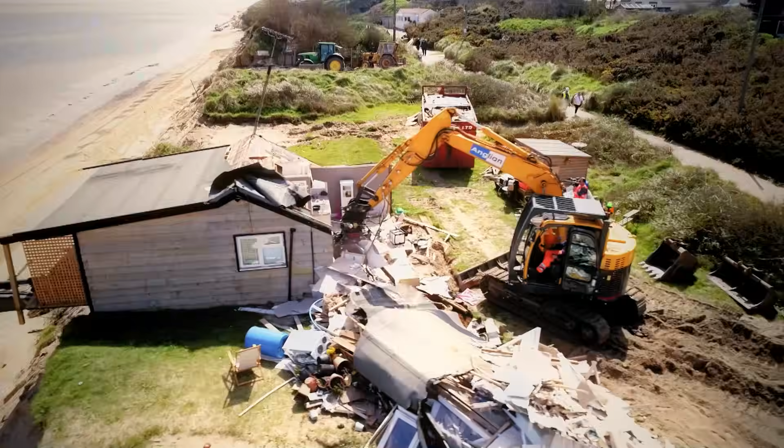With big builds, even the smallest mistake can be a huge disaster. From miscalculations to misunderstandings, these are the massive engineering mistakes that only an expert can hope to fix.

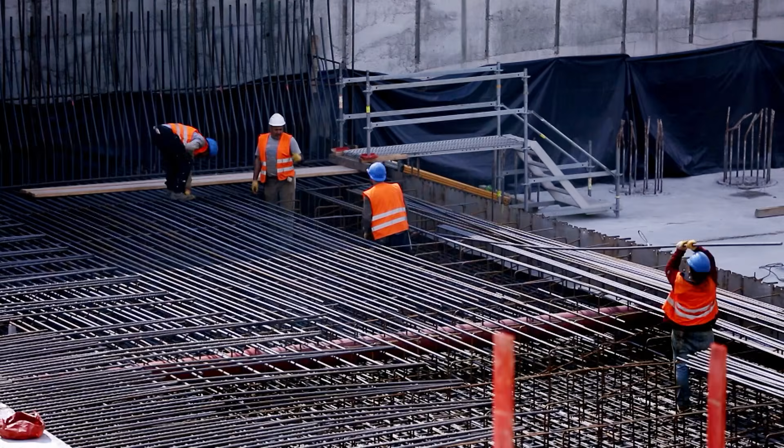When it comes to revolutionary design, sometimes we can learn from the past, other times we can improve on it. But rebuilding on an old foundation can be a huge mistake.

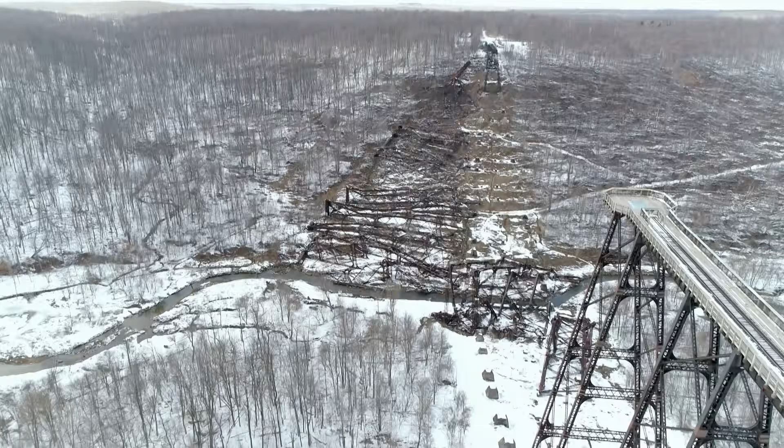For this construction calamity, we head to Pennsylvania, USA, and a famous bridge that fell from grace. This is a massive fail. It's utterly incredible that no one got hurt. If a train was going over it, it doesn't bear thinking about. What was once considered the eighth wonder of the world is now a relic of engineering oversight.

The small town of Kinzua, like many other places in Pennsylvania, was central to America's steel production. In the 1880s, demand spiked and trainloads of coal were needed to feed the factories. Railroad engineers faced a giant obstacle, the steep, deep Kinzua Gorge off the foothills of the Appalachian Mountains. The trains had to get through, so they set to work on one of the most ambitious construction projects of the day, the Kinzua Bridge.

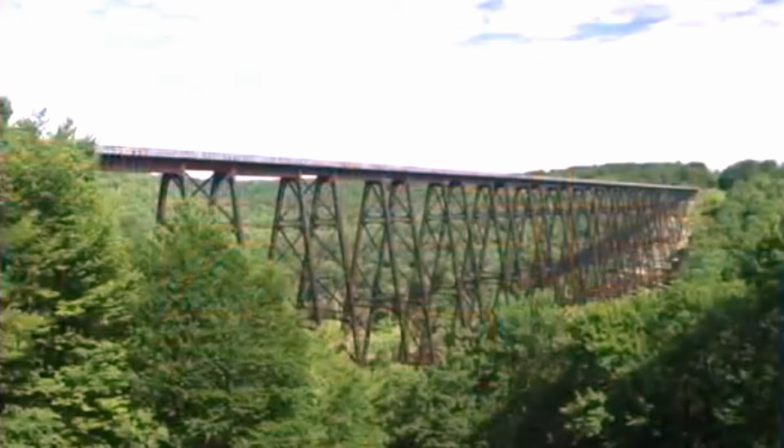Completed in 1882, at over 300 feet tall and 2,000 feet long, Kinzua Bridge was the tallest railroad bridge in the world. At the time, this was pretty much the eighth wonder of the world. It was such an unbelievable achievement. Even with today's technology, this would be a challenge, let alone back in the 1800s. So to actually achieve a viaduct over that size gap was incredible.

Jerry Clark from the Bridge Foundation knows what made this build so epic. Other railroads went around the Kinzua Valley. The bridge went across it and used every bit of the engineering technology available during that time. To achieve this shorter direct route, the bridge had to be high, long, and capable of supporting heavy coal trains. Engineers ruled out the conventional bridge-making materials, stone and cast iron, instead choosing wrought iron.

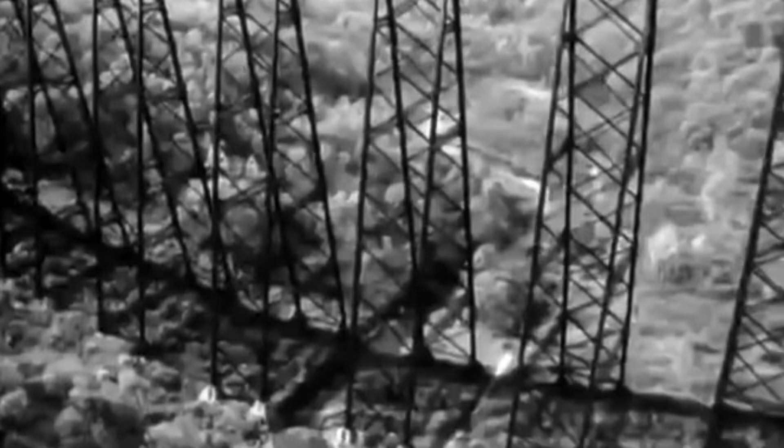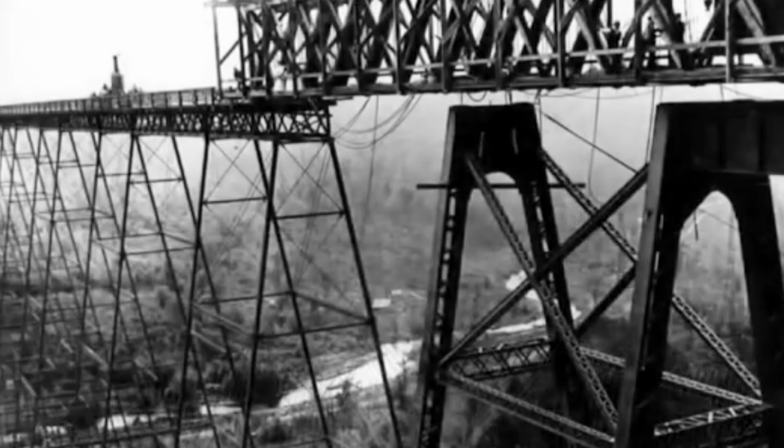Building a bridge of this size out of stone or brick would have taken forever, and using cast iron would have been too brittle, so they looked to wrought iron as a suitable material. Wrought iron had another advantage too: it's malleable. So they used sheets of iron to create an innovative support structure known as phoenix columns. These phoenix columns were made out of wrought iron that was folded around and held together with rivets, and this made them stronger and lighter. The revolutionary design was also quicker and cheaper to build.

However, within a decade, locomotives doubled in weight. This meant more strain on the bridge and more vibrations. Vibrations are not a bridge's friend. You expect them up to a point, but here we had a tall, long bridge with trains going over. The trains were getting heavier and heavier. They had to be careful not to push it too far. The material could withstand it to a point, but whatever they did, they did not want that material to crack.

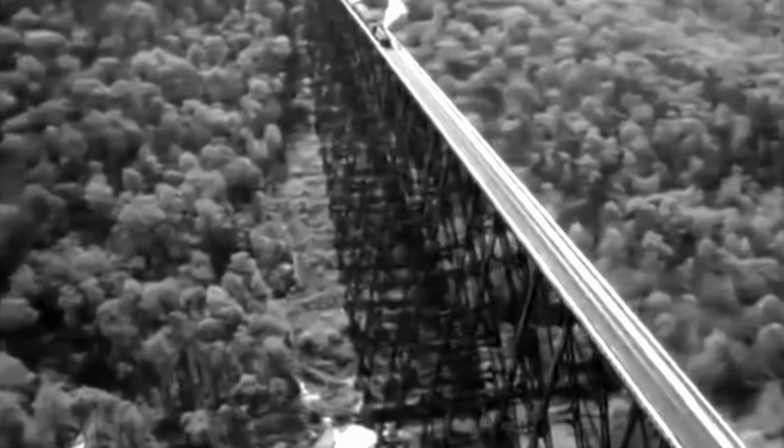To minimize vibrations, trains were forced to cross at just 8 kilometers an hour, not the most practical solution in a fast-moving world. Fortunately, an alternative was now readily available: steel. At the time, steel was the strongest, lightest and most flexible bridge-making material around.

So it sounds crazy, but they actually ripped the old Kinzua Bridge down and rebuilt it in steel. No bridge meant no coal, so a quick construction was essential. In just a matter of months, 120 men erected the new bridge. 90 days is all it took to completely rebuild the tallest railroad bridge in existence.

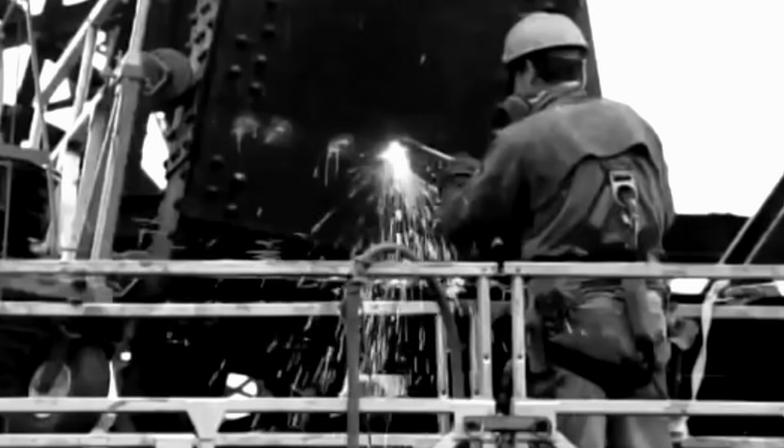The new steel bridge used the original trestle design, with large A-frames supporting the pier on top. It could now carry as much coal as the steel mills needed. But in an effort to save time, a decision was made that would turn out to be disastrous.

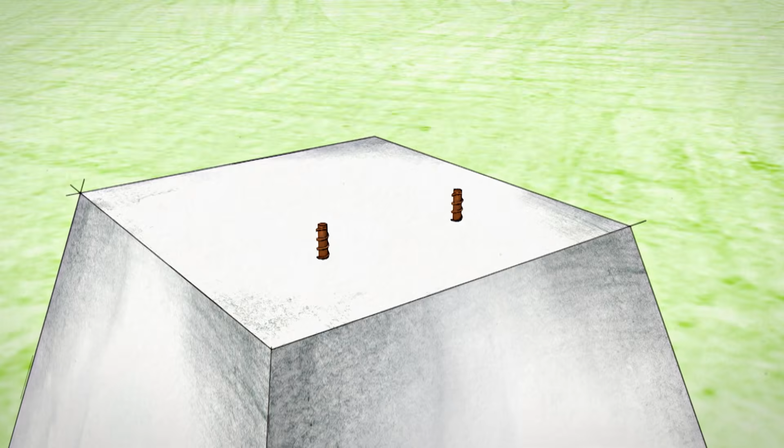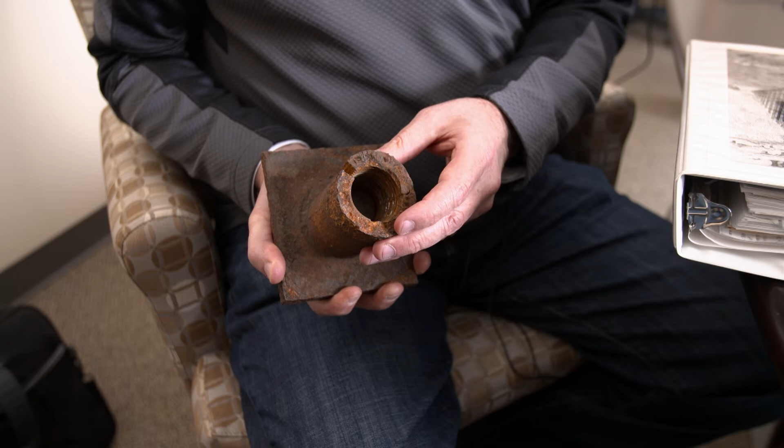Rather than installing new steel anchor bolts to hold the bridge in place, the legs were secured to existing bolts. They were too short, so engineers used extending nuts called collars to bridge the gap. Replacing these anchor bolts would have taken forever — you would have needed to dig out and blast away. It would have been a real hassle, so instead they just put these collars over the top. At the time, the collars seemed a reasonable solution, but they hadn't completely factored in Mother Nature.

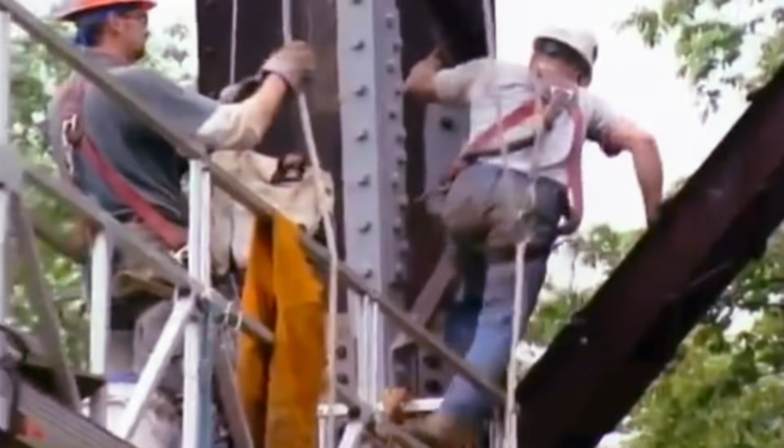This quick fix did the trick, and the bridge carried freight and passenger trains for over a century without incident. In 2002, a maintenance team discovered corrosion on the bridge's legs. They closed the bridge to trains and pedestrians and began repair works.

But in the summer of 2003, disaster loomed. An epic tornado spiraled towards the Kinzua Gorge. Structural engineer Brian Emberg was on the restoration team.

In July of 2003, I got a phone call in the middle of the afternoon that a tornado had hit the bridge. I jumped in my vehicle right away, made the trip, and got here right about dusk. It was clearly a tornado scene — trees everywhere, clouds and mist. I met with the crew and made my way down to the edge of the ravine, turned the corner, and the valley just looked filled with smoke, like you would expect after a battle.

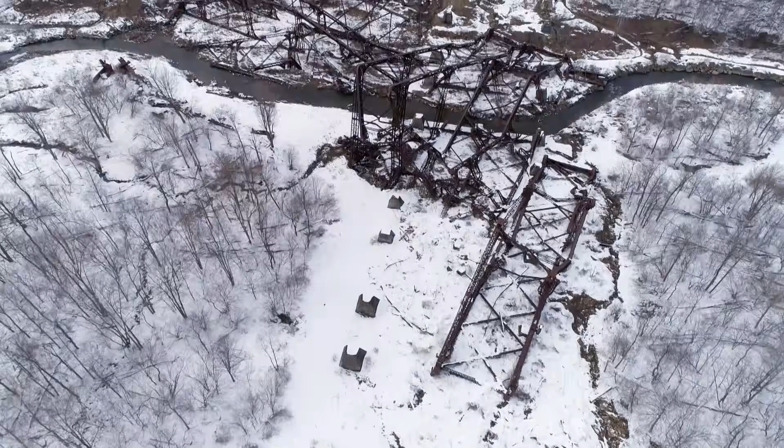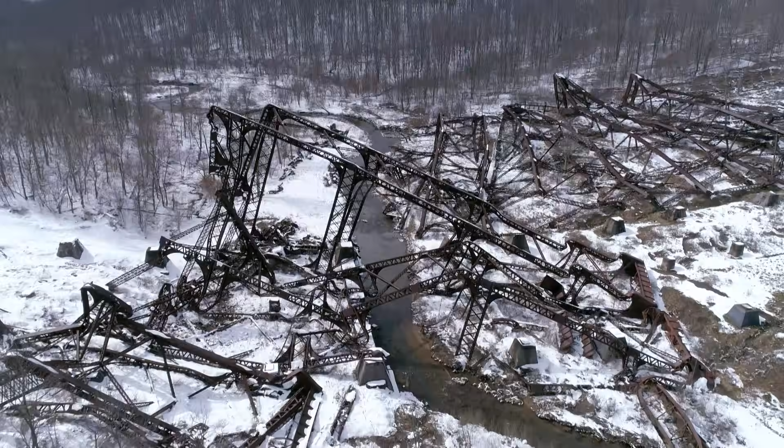You could barely make out the structure in the fading light, and you could see pieces of steel emerging from the fog, and what remains of the structure still standing. It was clear it was a catastrophic failure. The 160-kilometer-an-hour tornado had sent a huge section of the bridge crashing to the valley floor.

This must have been so frustrating — they were onto this problem, they saw it, they were acting on it. If it struck a few months later, they would have been fine. This is such bad luck.

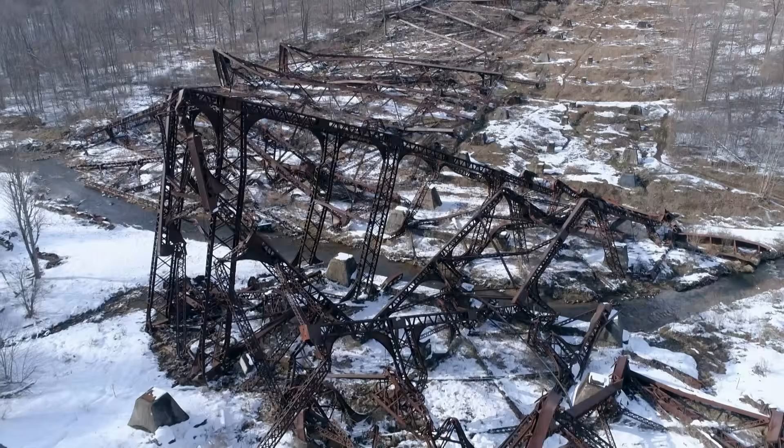Although devastating to the repair team that spotted the corrosion, closing the bridge had potentially saved hundreds of lives. To have such a freak storm of nature come in and take it down was really devastating to my crew, my team, and me personally, that we weren't able to get to it and save it in time.

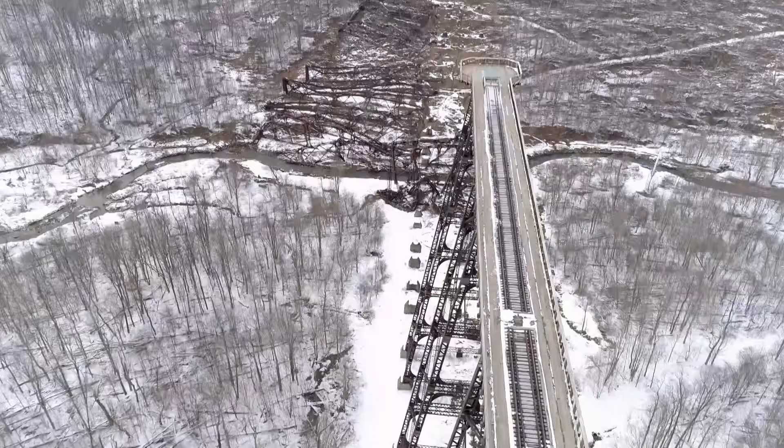Had the tornado arrived a year later, we'd have finished with the repairs and hopefully sustained the structure so it would have survived the storm. The day that it fell down in there, you kind of felt like you lost a family member.

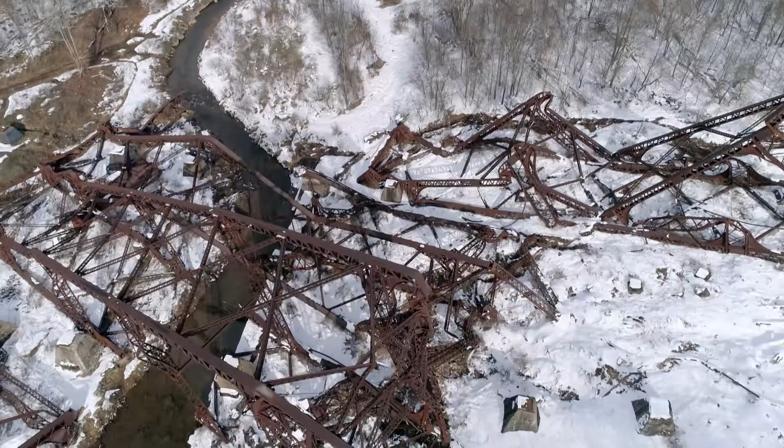Brian and his engineering team suspected the original iron anchor bolts and new steel collars were to blame, and their suspicions were confirmed in the wreckage. The next morning, I went down to the valley and found these anchor bolts and couplings littering the floor everywhere, where they had ruptured and failed at almost every single pier. The choice not to replace the iron anchor bolts with steel was catastrophic.

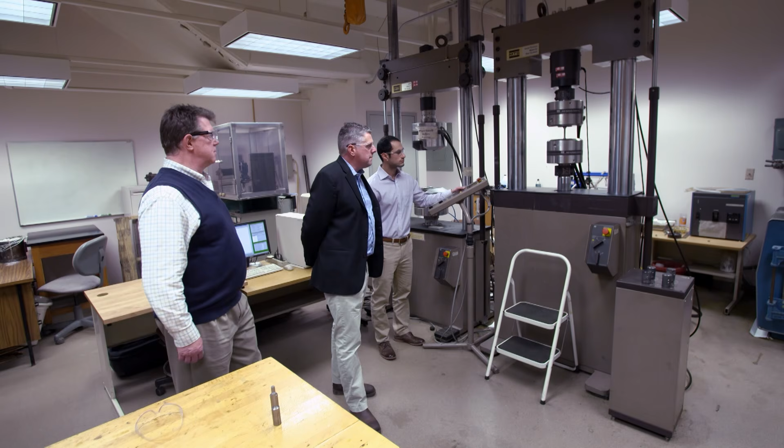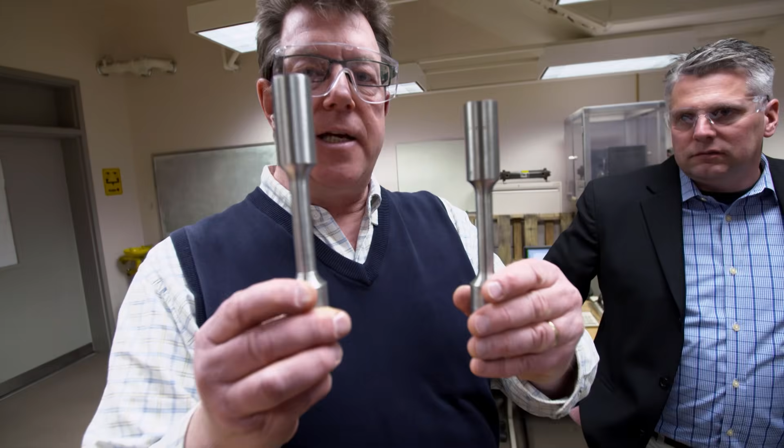To demonstrate steel's strength and flexibility, mechanical engineers Dr. Mark Zupan and Dr. Tim Topoleski are using a load frame. The one on the right is 1018 steel, and the one on the left is cast iron. You can kind of see that they look similar, so looks can be deceiving. We're going to test the two of them and see what happens. The load frame measures the amount of force required to fracture the metal by pulling it from each end.

First up, the iron. In tension, cast iron expresses a brittle behavior — a behavior in which it fails without warning. Now the steel. There it goes — the steel exhibits what we call ductile behavior. You'll see the specimen narrow in the middle, and that's what we call yield behavior. Essentially, the specimen is absorbing energy to allow it to handle more load, and therefore, in contrast to the cast iron, you get a warning before it fails.

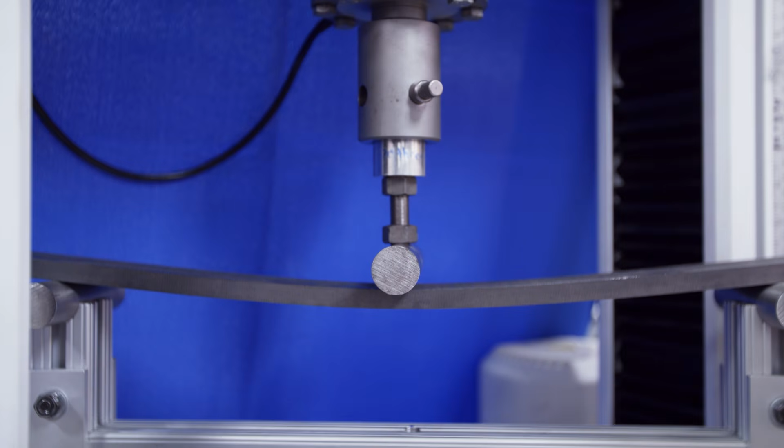So although similar, steel's structure gives it increased flexibility, whereas iron can crack without warning. Metals can either be brittle or ductile. A brittle material like cast iron shatters when it breaks, much like glass. A ductile material like steel, though, deforms before it breaks, giving you a visible warning sign that failure is about to occur. So when you use steel in a bridge, you get a warning that it's about to break before it does.

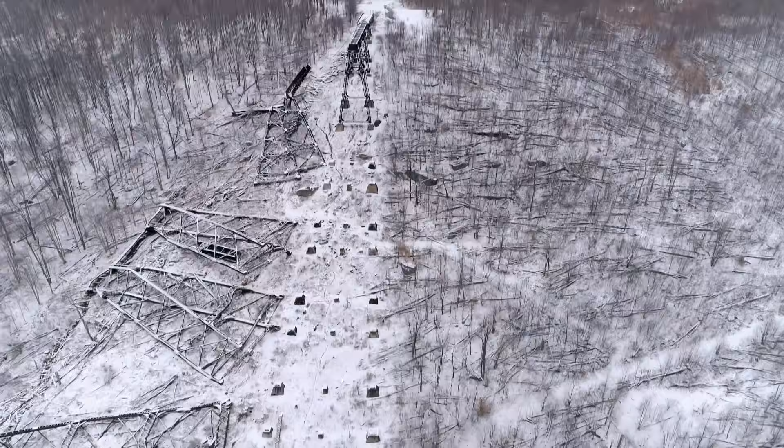Although steel was clearly the stronger and more flexible material, the bridge's iron anchor bolts didn't fail until the tornado of 2003. The problem was that the original designer didn't think there was going to be uplift. Uplift comes from wind blowing on the towers. When wind blows on the tower, it wants to try and overturn it, and so on this leg there would be uplift. The original designer used these because he didn't think there would be uplift, when in fact there would be with a 100-mile-an-hour wind. And it turned out to be inferior, especially after years of wear and tear, and it cracked.

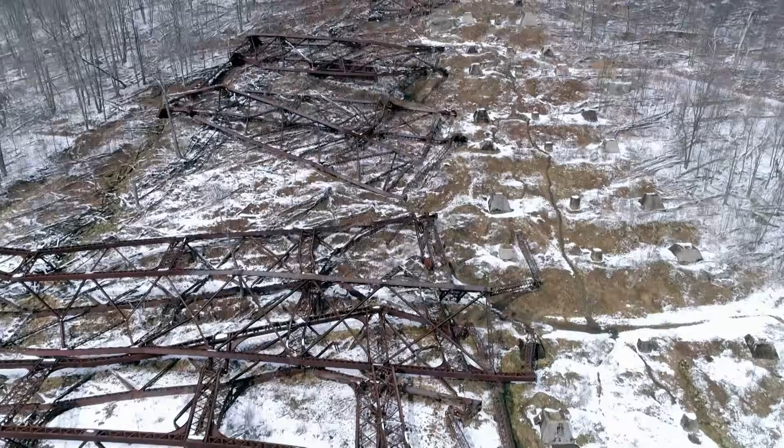A combination of extreme weather and the decision not to replace the anchor bolts over a century ago was the undoing of this epic piece of engineering. This was a hugely ambitious project, and at the time it really pushed the boundaries of engineering knowledge, and it looks like a tiny miscalculation and the use of these collars unfortunately led to the demise of this bridge.

Today, around 180 meters of the structure still stands. Rather than tear it down, it was kept as a monument to mankind's ingenuity in engineering. Everything here could have been scrap metal, but there were people that had the foresight to say, this is worth saving. Actually, there are more people that come to the bridge after it was down than when it was up.

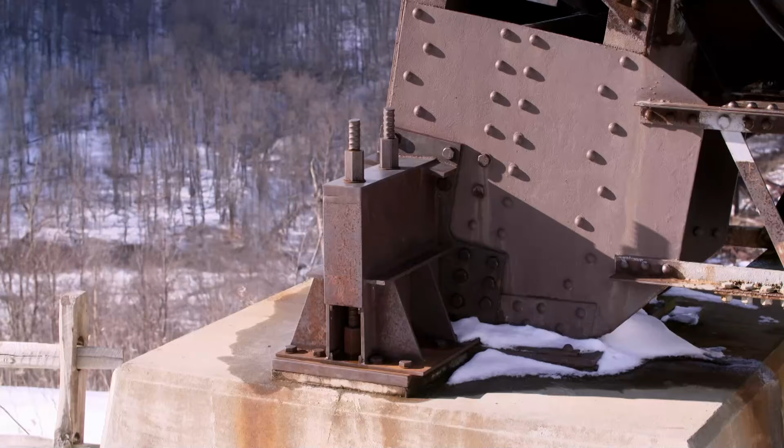To prevent any further collapse, Brian and his team have devised a solution. It's no surprise that it includes steel anchor bolts, an idea that the original engineers overlooked. When it comes to the foundations, you should never cut corners. It may have taken over 100 years, but that lesson was learned in spectacular style.

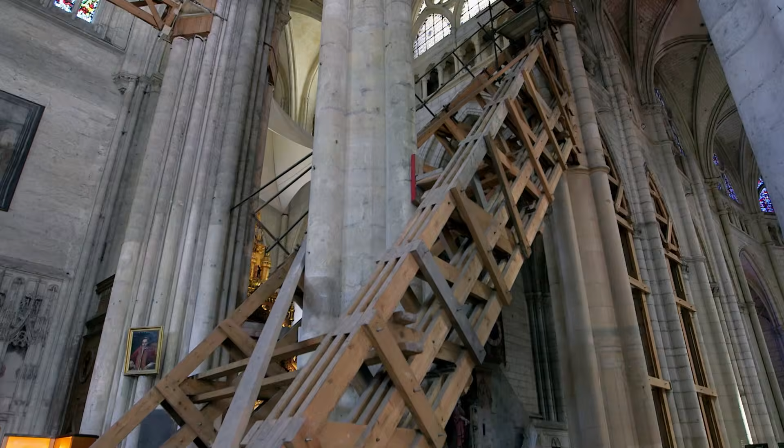Some construction calamities are unhappy accidents, but other times, engineers really should have known better. Like this story in northern France, and a cathedral that's experienced a catalog of catastrophes. This one is a blockbuster of a building blunder. It seems the engineers' zeal to reach the skies clouded their better judgment. This cathedral has been the victim of a combination of tragedy and folly. And when modern-day engineers tried to make a fix, it almost ended in disaster. It's a miracle it's still standing.

Beauvais, a small city in northern France. But there's nothing small about its 800-year-old centerpiece, the gravity-defying Cathedral of Saint-Pierre. So we've got Sagrada Familia, yep, Notre Dame, yep, St. Paul's, but St. Pierre's of Beauvais.

Although little known outside of France, the ambition of this cathedral once rivaled any other on Earth. Dr. Tom Nickson is an expert in religious architecture. Beauvais Cathedral was begun in the 1220s by an extremely ambitious Archbishop, Bishop Milo of Nanteuil, and his vision for this cathedral was really something that would trump all the other major churches in France and the region.

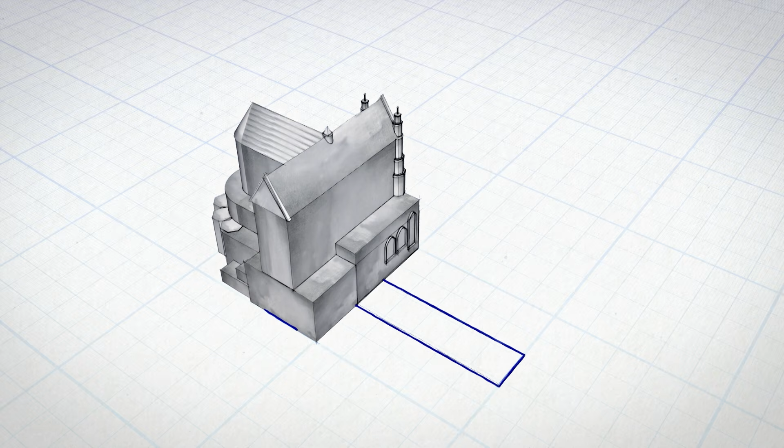Most cathedrals are designed in the shape of a cross, with three main sections: the choir for the clergy, the transept, which forms the arms, and the nave for the congregation. The nave is often long and grand, but here there was an obstacle. Beauvais could never be particularly long because the site was constricted by the presence of the Bishop's Palace at the West End. So it could respond to the ambitions of its patrons by being, first of all, very wide, but it could also be very, very tall. And this church, as built, was taller than any Gothic building ever built.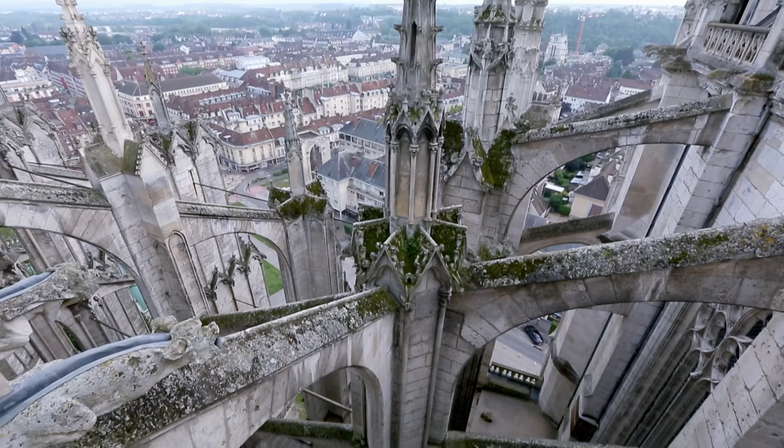And size was very important. With cathedrals, just like stadiums and concert halls, the aim is to have as much space as possible under one roof. But of course, the taller and wider you go, the bigger the engineering challenge. And the greater the chance of making catastrophic mistakes.

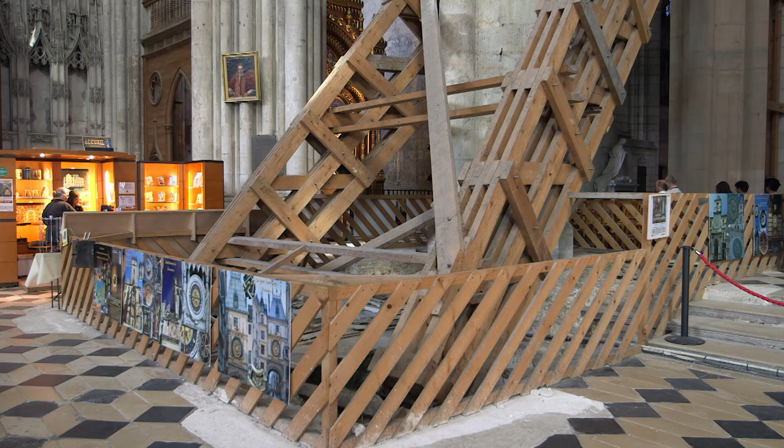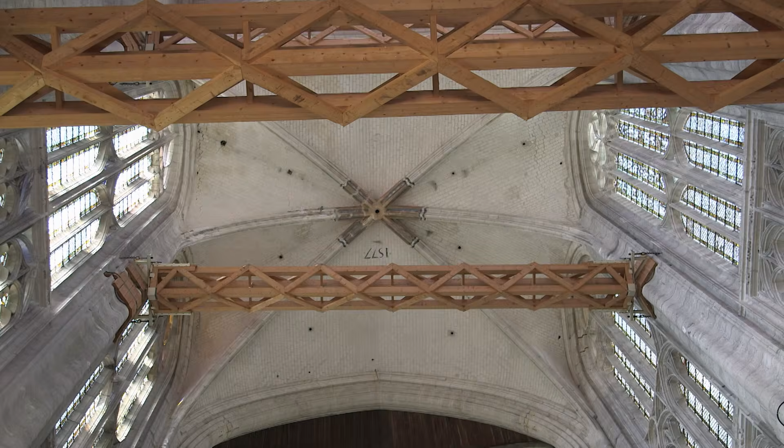On close inspection, the grandeur of Saint-Pierre is overshadowed by centuries of repairs that literally hold the building together. And it's all because the original engineers were more focused on height than stability. In fact, their drive for height was so relentless that they had to hold up the tall, unstable walls from the outside.

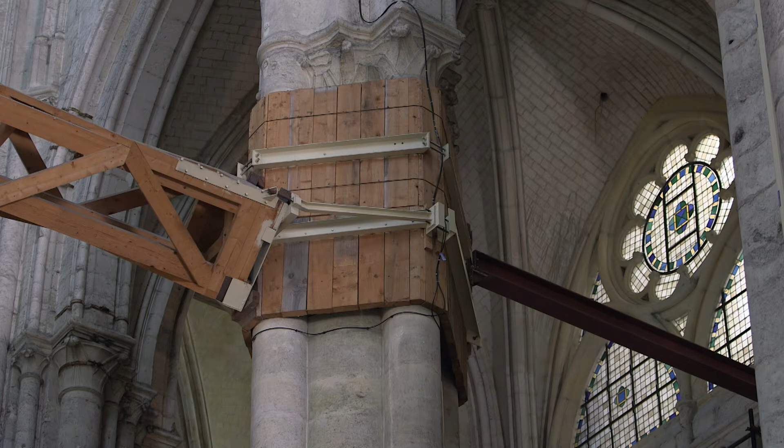So it's really remarkable to be able to come up here to the upper parts of the cathedral. Up here, we can really get a sense of the way that this forest of flying buttresses supports the upper levels of the choir. And what's really extraordinary, I think, is many of these flyers, these piers, are still super slender.

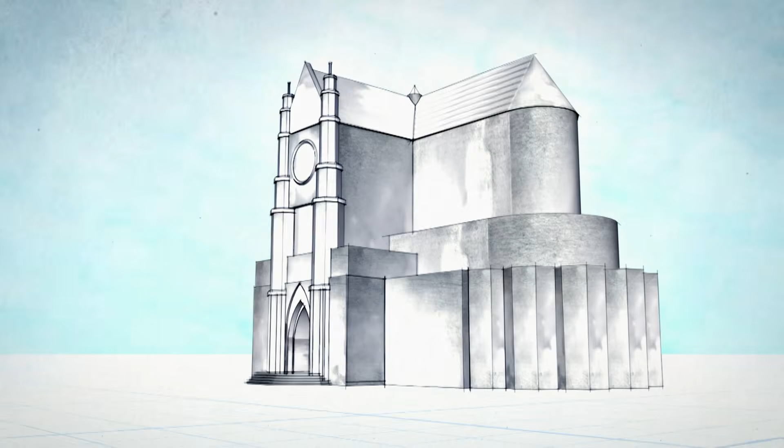Flying buttresses act as an exterior skeleton to support the cathedral, but are built to look ornate and elegant, not like mere scaffolding. Engineers hoped these buttresses would be strong enough to prevent collapse.

They're working very hard to ensure that the windows are not obstructed at all, so that we have this wonderful sense of vertical thrust from the cathedral, even though the reality is the very opposite. What we have is gravity trying to pull this building down.

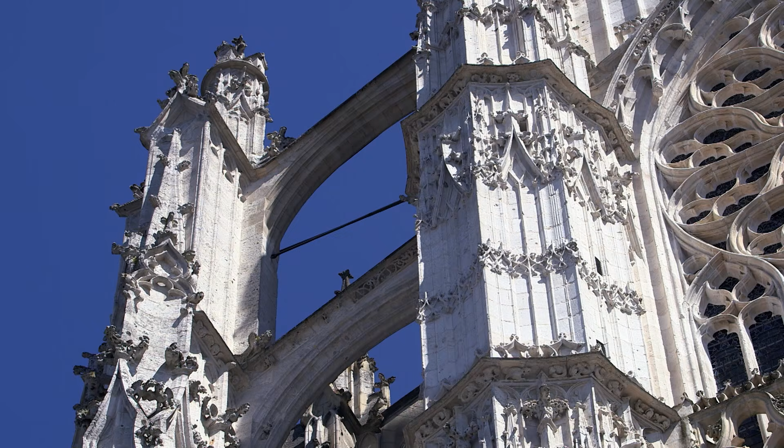Back in 1284, Saint-Pierre's ongoing battle with gravity came to a head when a fierce storm hit the town of Beauvais. The devastating winds twisted the flying buttresses, forcing them to breaking point. Suddenly, the high vaulted ceiling came crashing down.

The city didn't let that stop progress. The damage was repaired and construction continued. In the 1500s, the cathedral reached dizzying new heights, with the lantern tower soaring over the choir.

Jean-Lucien Guénon, one of France's chief architects, explains.

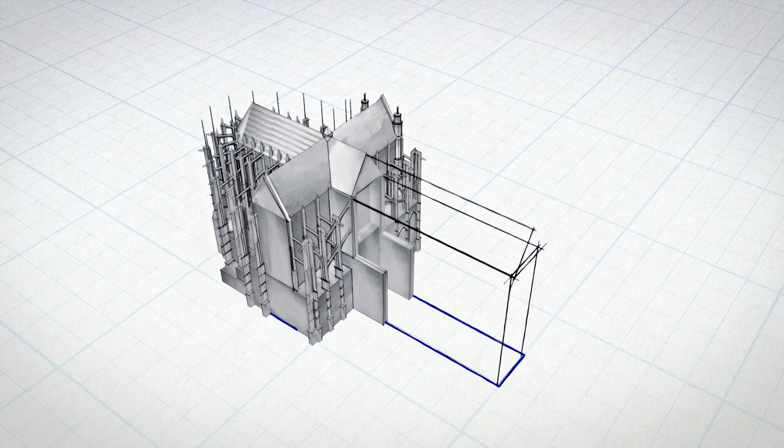Defying centuries of cathedral construction logic, Saint-Pierre's was built with only the start of a key structural element: a nave.

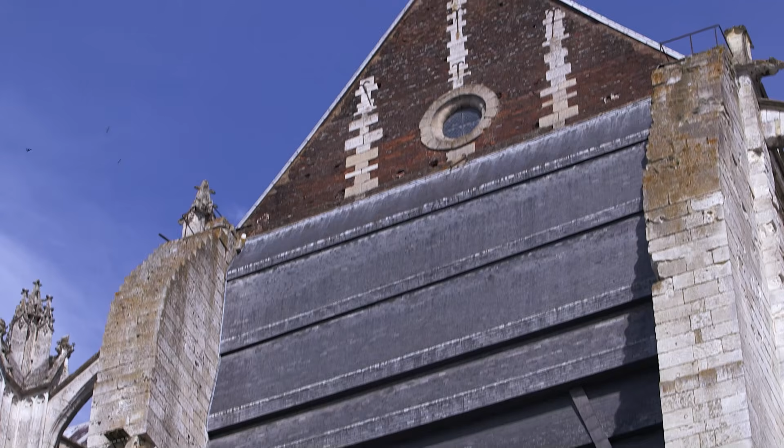So here we can see the junction of the 10th century cathedral, which originally extended much further to the east, and the new work, the new Gothic church begun in the 1220s, although what we're looking at here is really the transept in the very beginning of the nave, begun in the 16th century.

The ancient church didn't provide any support for the massive new cathedral. Leaving the nave unfinished was a fundamental error. The huge weight of the towering walls was pushing them outwards.

They went to all the trouble of digging 10-meter deep foundations, which would have been a huge undertaking, and yet they didn't finish off the nave, which is the essential part to keep the rest of the cathedral standing.

Fixing the damage caused by the collapses finally drained cathedral finances, and construction of the nave was put on hold for a few hundred years.

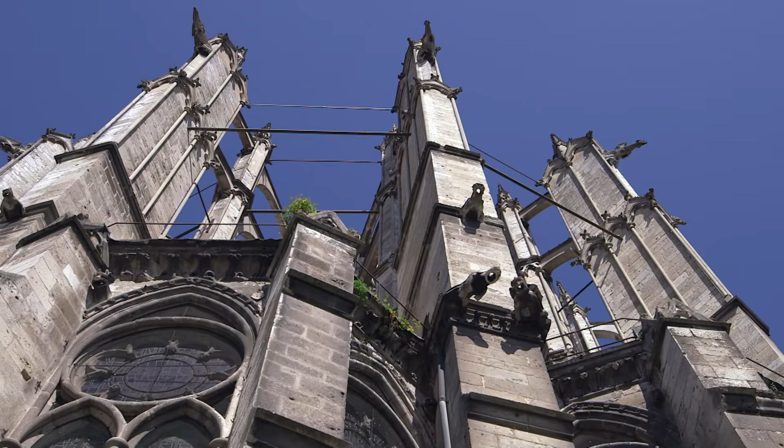Fast forward to the 1960s, and modern-day engineers thought they knew better, with almost catastrophic results. It was decided to replace them, but this time not with iron, but with steel tie bars that had less flexibility. Whereas the old structure had a certain amount of give and take, it could respond to the winds, the new structure was much more rigid.

By replacing the iron tie bars with steel, a more rigid alternative, the cathedral had lost its flexibility, which left it at the mercy of Mother Nature. So basically, by trying to modernize the fix, the engineers had actually made the cathedral more vulnerable than it had been for centuries.

With such a fragile piece of architecture, today, engineers keep a watchful eye on any change in the cathedral's stability. Saint-Pierre is closely monitored, using modern technology. Constant Chacoz and his team use highly sensitive sensors to detect the slightest movement.

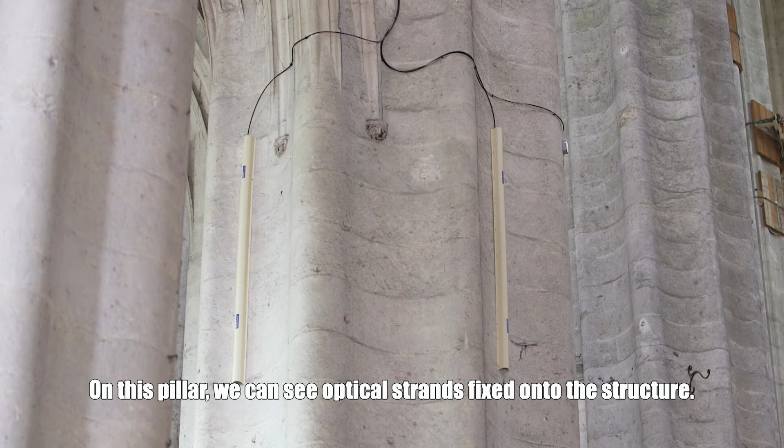On this pillar, we can see optical strands fixed onto the structure. Optical strands are very accurate sensors dedicated to the measurement of strain and displacement of the structures. The resolution of these sensors is about 1 micron, which is 100 times smaller than a hair.

1 micron might seem like a tiny amount, but when you've got thousands of tons of stone shifting around, I'd want to know exactly what was going on.

While monitoring for modern-day movement, Guillaume Caron is laser mapping the cathedral in 3D to check for hidden defects in the original construction.

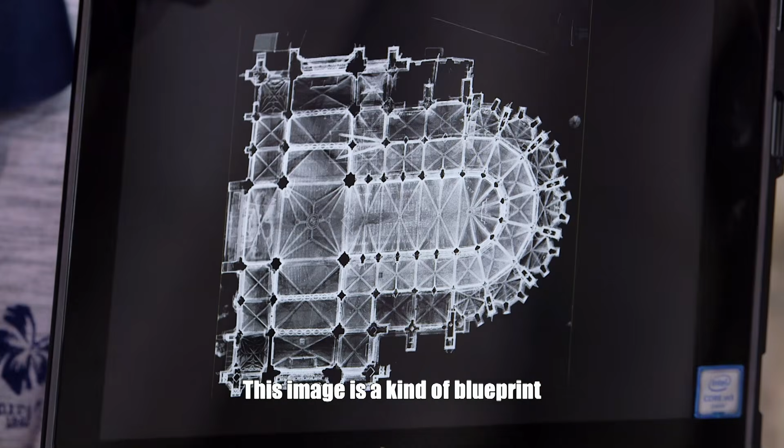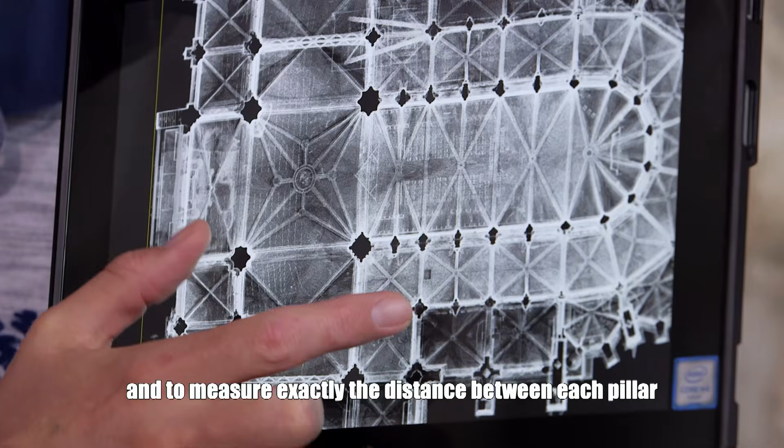This image is a kind of blueprint, but made from a 3D digital model of the Cathedral of Beauvais. And what is interesting from this information is it's not a manual drawing, it's got from measures. So from this digital blueprint, we can highlight some deformations and measure exactly, for instance, the distance between each pillar in the cathedral.

Laser scanners bounced high-energy light off every surface in the cathedral, creating a highly detailed picture of the building. It was so detailed, they could see things that weren't visible to the naked eye. What Guillaume's team has discovered is more than a little disturbing.

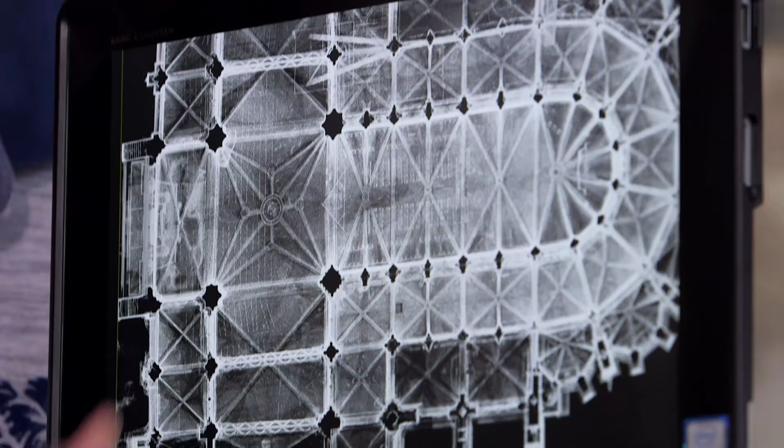So, using this image, for instance, we are able to highlight that the pillars that are on the southern part of the choir are very nicely aligned, but there are some misalignments between the ones in the northern part.

These misalignments have remained undetected throughout the ages, but reveal a whole new instability threat. We were surprised by these deformations and the fact that the building is still not collapsed.

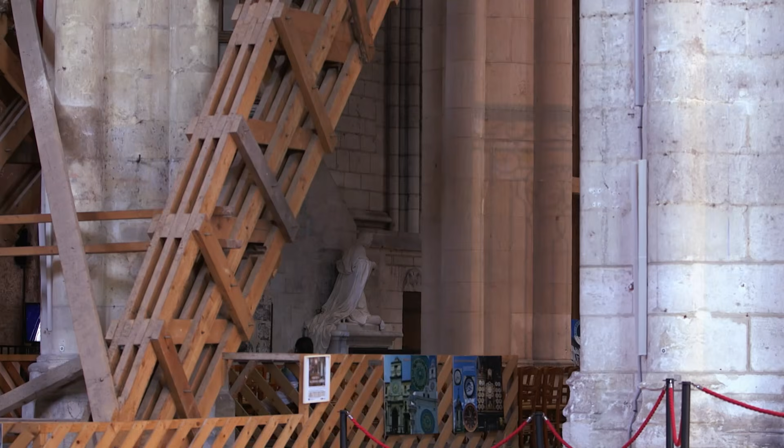To further stabilize the walls, engineers have taken the radical step of installing giant braces. The braces, they're not pretty, but at least the cathedral is still standing. This building is clearly a survivor.

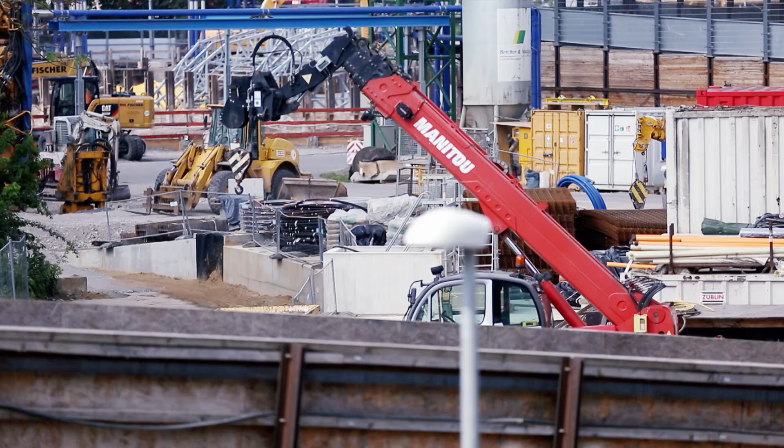Engineers building groundbreaking projects have to consider every worst-case scenario they can dream of. But sometimes, even the best-laid plans can turn dreams into unexpected nightmares.

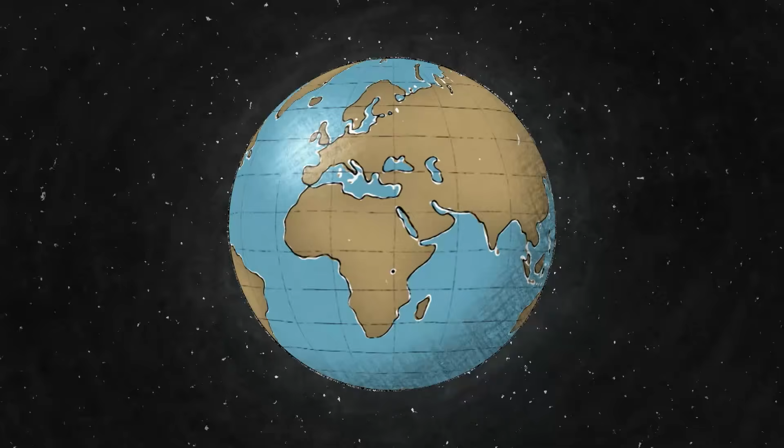Our story begins in Illinois, where a radical piece of engineering dating from 1900 has inadvertently opened the Great Lakes to invasion.

5 to 10,000 of them just erupting out of the water. I've been struck in the head, one nailed me right in the thigh. This Army engineering solution is truly shocking.

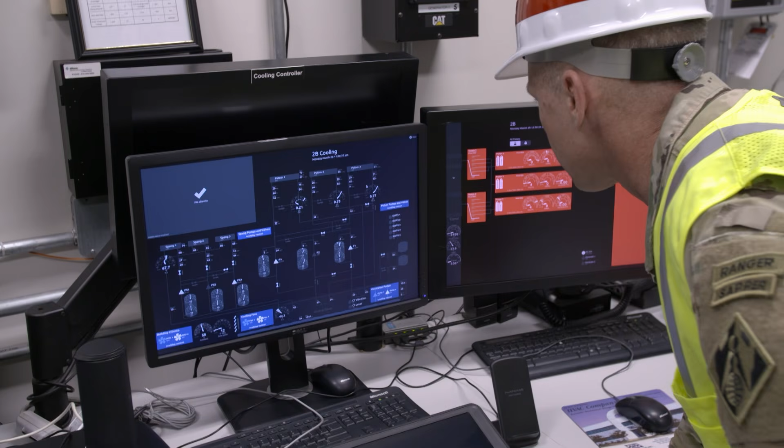Chicago, Illinois. In the 19th century, the Windy City grew from a staging post to one of the most influential places on Earth. Home to hot jazz and deep dish pizza, Chicago is the place to be. And in the summer, there's no place you'd rather be than on the nearby shores of Lake Michigan.

Lake Michigan is one of North America's 5 Great Lakes, the largest group of freshwater lakes on the planet. Jennifer Caddick represents the Great Lakes Alliance. The Great Lakes region supports a multi-billion-dollar tourism industry, but there's also a thriving hunting and fishing economy here. People come from all over the world and all over the states to hunt, fish, and recreate here.

By the late 1800s, Chicago's rapid growth posed a problem: more and more sewage. Back in 1900, Chicago had problems where their sewage, all of their waste, were flowing into the Chicago River, and then that was flowing out into Lake Michigan and right towards their drinking water intakes.

To stop sewage from contaminating the fresh water of Lake Michigan, engineers came up with an epic idea: to send the city's waste in another direction by reversing the flow of the Chicago River.

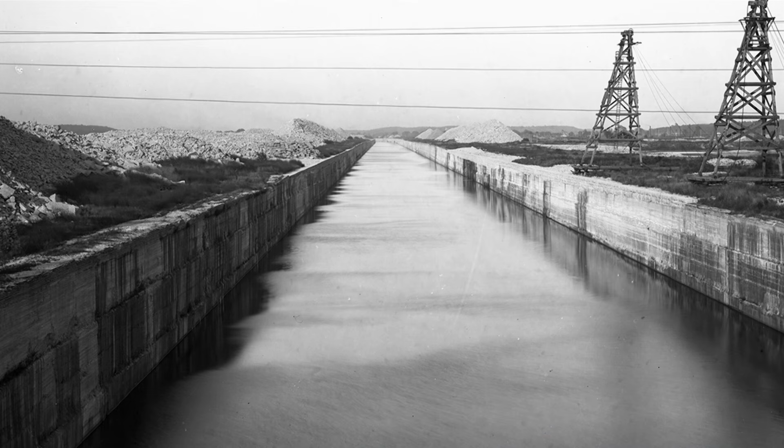Work began on the Chicago Sanitary and Ship Canal, connecting the Chicago River with the Des Plaines River, 45 kilometers away. The new waterway connected Chicago with the Mississippi Delta and ultimately the Gulf of Mexico, not only solving the sewage problem, but also creating a trade route.

However, the ingenious engineers had unknowingly opened up the Great Lakes to a major threat. I'm stating the obvious here, but connecting 2 waterways that have never been joined before sounds like a recipe for disaster. This disaster came in the form of an invasive interloper, the Asian carp.

Initially, in the 1970s, the Asian carp were brought in intentionally to eat algae in sewer treatment plants. However, they have since escaped via flooding into the surrounding waterways and are now running rampant throughout the Mississippi Delta and right up toward the Great Lakes.

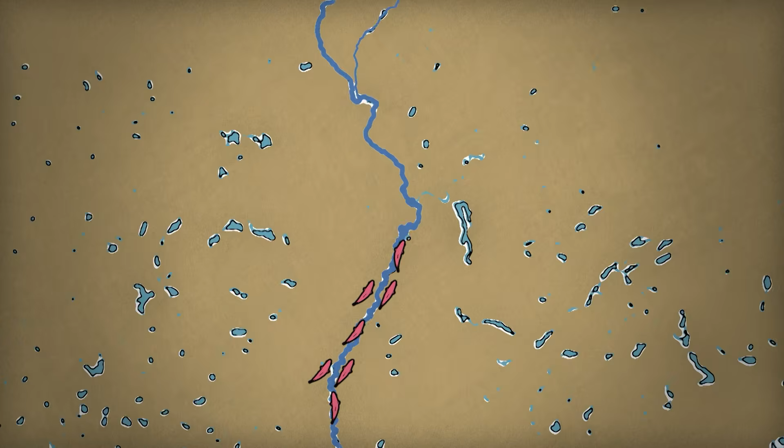Asian carp are a highly invasive species that spawn rapidly. They overwhelm native fish, consuming their food and threatening their very existence. By the 1990s, the carp had spread to the Mississippi Delta. Today, they are within mere miles of Lake Michigan, and they are still on the move.

Asian carp are not only a threat to native fish, but they can also be potentially lethal to humans. They weigh up to 45 kilograms, and when startled, they can leap out of the water unexpectedly. With a tourism and leisure industry worth billions of dollars a year, the last thing the Great Lakes need is Asian carp.

To stop the subaqua menace in its tracks, an engineering solution is in place at Romeoville, 50 kilometers southwest of Chicago. It's an underwater electric fish barrier.

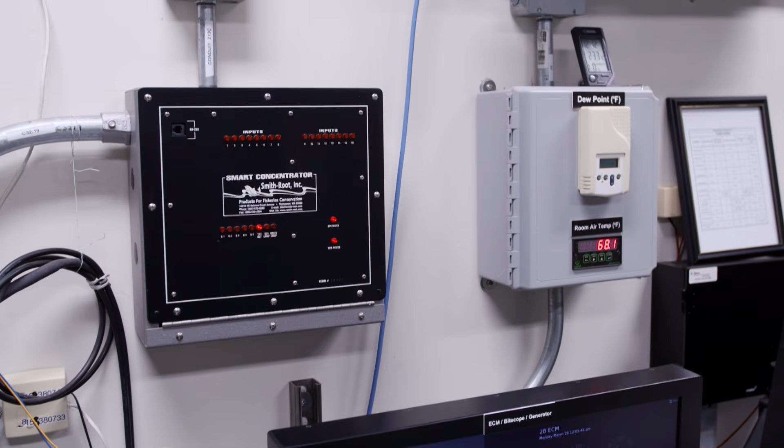The barrier is operated by the U.S. Army Corps of Engineers. Colonel Reisinger is in charge. This is our control facility, which puts electricity into the Chicago Sanitary and Ship Canal. What you see here are the control systems that allow us to control the amount of voltage which we want to put into the water. That allows us to have the most effect on the Asian carp that we're trying to deter in this waterway. The input power for one of these systems is 1.5 megawatts, about 2,000 volts per electrode.

Colonel Reisinger is on a mission to hold back these foreign invaders. We are standing on top of barrier 2 Alpha. Each barrier unit generates an electrical field reaching across the canal. As the fish moves from downstream to upstream, they run perpendicular to that electric field generated. When that fish hits that wide array field, our intent is to create enough voltage potential there that the fish decides it's uncomfortable enough that it just turns around and goes back down river.

Romeoville actually has 3 separate electric barriers at intervals along the canal, in the hope that if a carp gets through one, it will be stopped by the next. Further up canal, we have barrier 2 Bravo, and then even further up from there, we have what we call the demonstration barrier. If that fish pushes through the wide array field and gets into the narrow array field, we have a higher voltage drop potential, at 2.3 volts at the surface of the water.

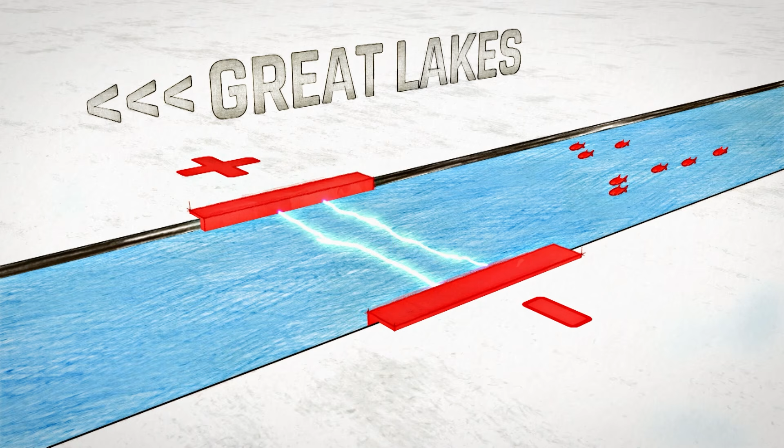If the electric field is undisturbed, it's hard for any fish to get through. However, when a big metal boat goes through that field, it breaks up the field, and fish can slide in on the bow wake. Also, if fish are in big groups, the outer fish disturb the electric field, and the inner ones can slip through.

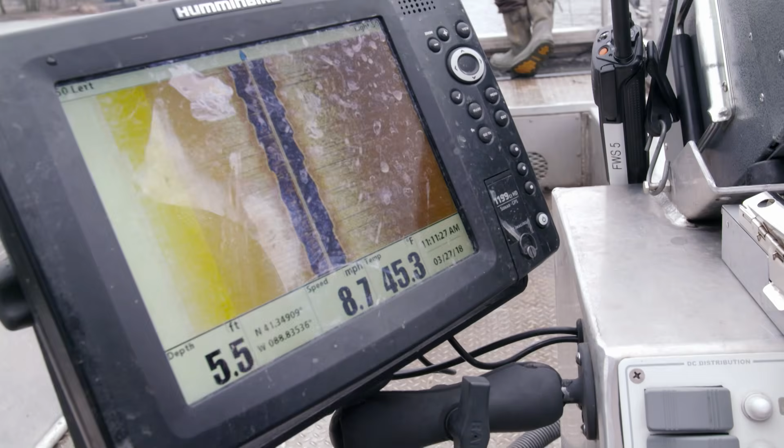With invasive fish potentially slipping through the barrier, regular patrols downstream monitor and head off the problem. Expert fish hunter Justin Peterson has his sights set on carp. Today we're looking for small Asian carp. This past summer, we caught a silver carp in a marina that was 5 miles from Lake Michigan.

Carp are extremely dangerous. They'll jump into the boat. I've been struck in the head. I had a big bruise on my thigh once from one that nailed me right in the thigh.

Justin's methods are just as shocking as the barriers. Fish get stunned by the electricity. We net them, put them in this tub. Every Asian carp that we catch is weighed and measured.

It's a war on carp. We're at the front lines here, trying to beat them back, and they're trying to keep going forward. At one point, we hit the electricity, and we saw them in the range of 5,000 to 10,000 of them just erupting out of the water.

When you're at war, it's important to know your fishy friend from your fishy foe. This guy here, that's a gizzard shad, quillback, smallmouth buffalo. And this guy here is a silver carp.

All these fish are stunned. Within 5 minutes or so, they'll be back to normal, and we'll release them back into the water. Minus the Asian carp - we don't release those ones.

Back in Romeoville, U.S. Army engineers are constructing a 4th barrier in an attempt to strengthen their defenses. A 4th barrier? That tells you all you need to know about the effectiveness of the other 3. Some people would say that building the 4th barrier is a waste of money because you're just pushing the problem along.

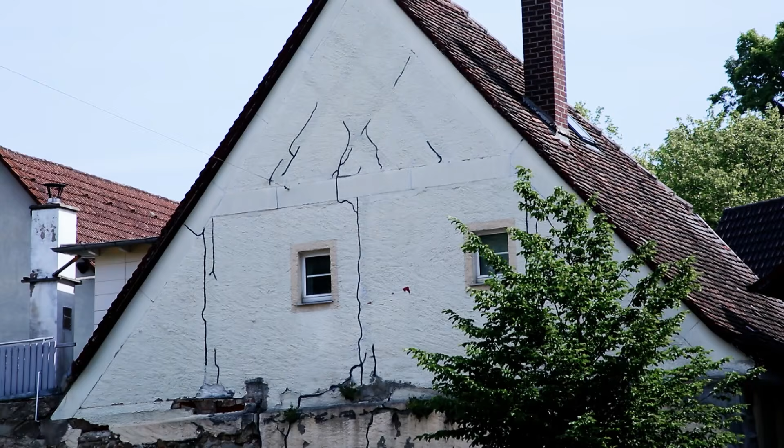It's an earthquake in slow motion. People thought about a catastrophe. It's a disaster that's spiraling out of control. This town is just coming apart at the seams. This is a nightmare in a land of fairy tales.

The ancient city of Staufen im Breisgau, with its 500-year-old buildings, looks like it's straight out of a fairy tale. But in 2007, an engineering disaster began to tear this town apart. Journalist and local resident Raina Ruther opens up on Staufen's nightmare.

Those who live here around the main square, they heard noise at night. They asked themselves, why can't I close my window? Why doesn't the door close anymore? Cracks started to appear on one building, two buildings, and people asked themselves what had happened.

The cracks continue to grow and spread. What you see here is one of the main affected buildings in Staufen. It's right on the Marktplatz, right on the market square. It's an earthquake in slow motion. This is what they say here.

The ancient town hall had sunk by almost a centimeter, or a third of an inch. A third of an inch might not sound much, but if your building hasn't moved for 500 years, that's a huge amount. After just two weeks, a staggering 68 buildings were showing signs of damage.

For pharmacist Peter Gasper, there was no cure in sight for this perplexing problem. We detected some cracks in the walls, and nobody was certain what was the reason or the cause of these cracks. Some people got emotional, some people thought about a catastrophe, and so everybody was worried. If you walk through the house, you can find cracks all over the house.

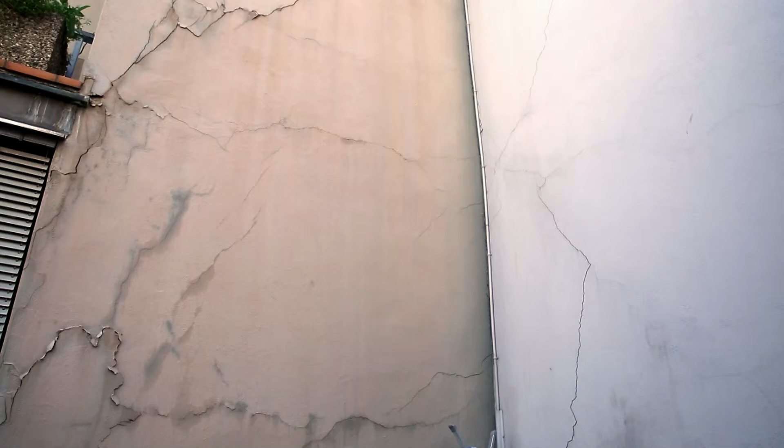Anxious residents called in geologists who discovered something extraordinary. Staufen had indeed been sinking, but bizarrely, the ground under the town had now begun to rise.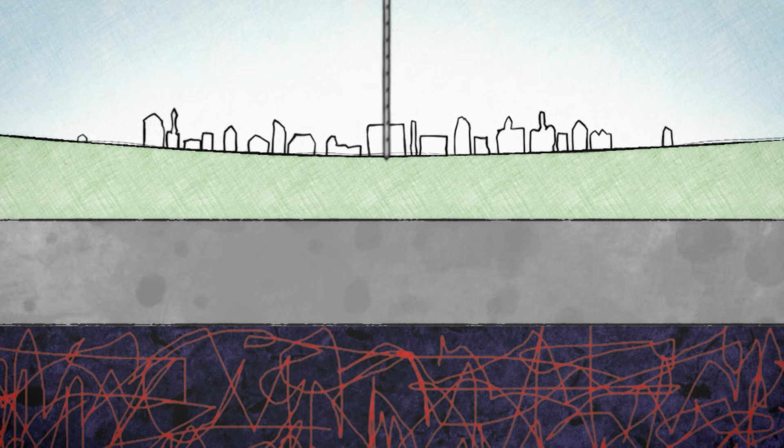The team quickly zeroed in on the culprit: a project to heat Staufen's town hall with a green energy source. The Earth's core is extremely hot and full of geothermal energy. To harness this geothermal energy, you need to drill down straight into the Earth's crust. This heat energy is then drawn up the borehole to the surface, where it powers heating and cooling systems.

Drilling began in 2007, just before the town started to crack. When I heard about the idea, when they wanted to repair the building, that they wanted to use geothermal energy to heat and cool the house, I said, what a good idea. And the town council unanimously said, what a good idea.

Free energy might sound like good news, but to reach the heat, engineers unintentionally triggered a slow-motion earthquake. To tap into this geothermal heat, they drilled a hole about 6 inches wide, about 140 meters or 459 feet down into the rock from the surface.

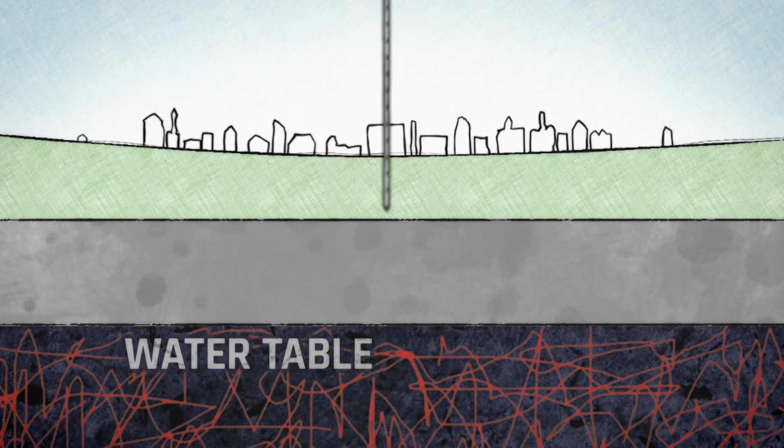There, they reached the water table. Anywhere on the Earth, if you drill down deep enough, you're going to hit something known as the water table. This is when water from the surface trickles down and settles at a certain level. That level will differ in height depending on where you are, but it's always going to be there. When they drilled down into the water table, there was an initial drop in pressure, and on the surface, things began to sink. Loss of water explains the ground sinking, but with the town rising, something else had to be going on.

After further investigation, the geologists realized the problem. The town was built on anhydrite.

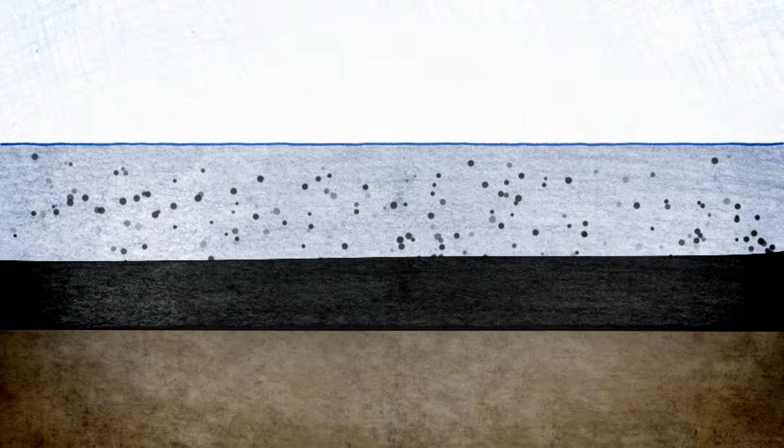Anhydrite was formed millions of years ago by the evaporation of salt water on ancient seabeds. Environmental scientist Konstantin Kinzua explains.

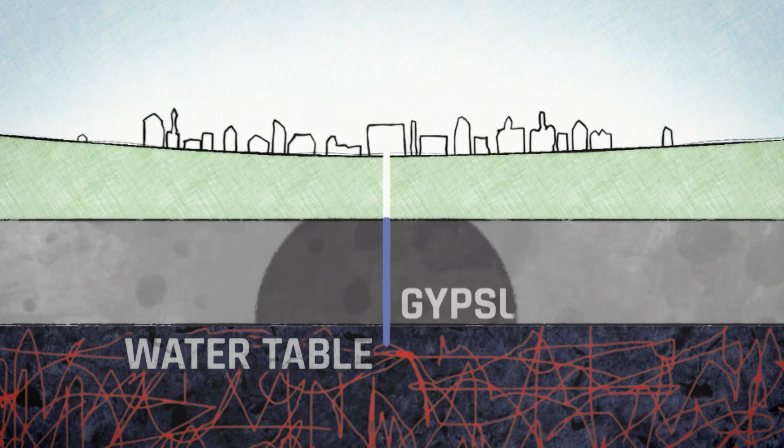So there's basically just a big layer of anhydrite right underneath Staufen. This commonly occurring mineral rapidly absorbs water. So when anhydrite and water mix, it expands and forms gypsum. The expanding gypsum creates subterranean pressure. Imagine the layer to be like a sponge, and you pour some water on it so it expands or bulges up right at the spot where you pour the water.

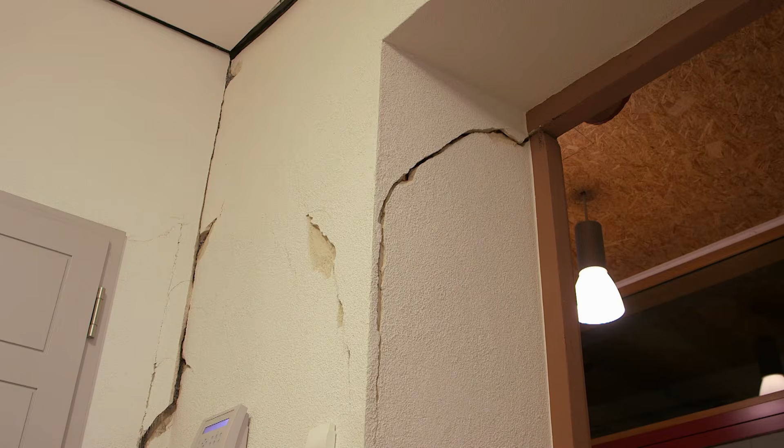And the surface itself bulges the same way. So if you have a house standing on top of it, the floor is basically tearing apart. The geothermal boreholes had brought the anhydrite in direct contact with the water table.

What I have here is a normal diaper. What this diaper has, and basically every diaper has, is superabsorber in it. This superabsorber is going to act as our anhydrite. Once I pour water over it, it's slowly going to absorb the water. It also increases in volume by quite a bit, and that's the same thing the ground is doing. So this is exactly what's happening underneath Staufen.

More than 10 years on, and the city continues to rise and crack. You've got to understand that this is relentless. Slowly but surely, the ground under Staufen is rising. Parts of Staufen have risen by up to 60 centimeters, and over 270 buildings are now damaged.

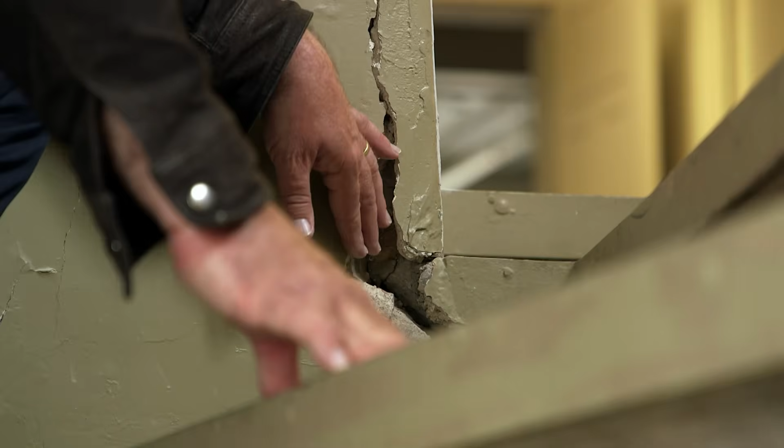So we're now right inside the town hall, and you see the cracks and the uplift, which has done all the damage to this ancient building. Well, this crack, you see, starts right down in the basement of the building, comes up here, and you see the damage that has been done to the building.

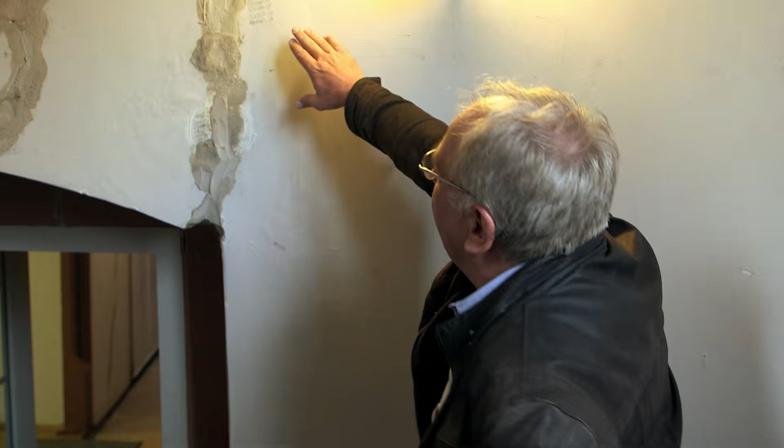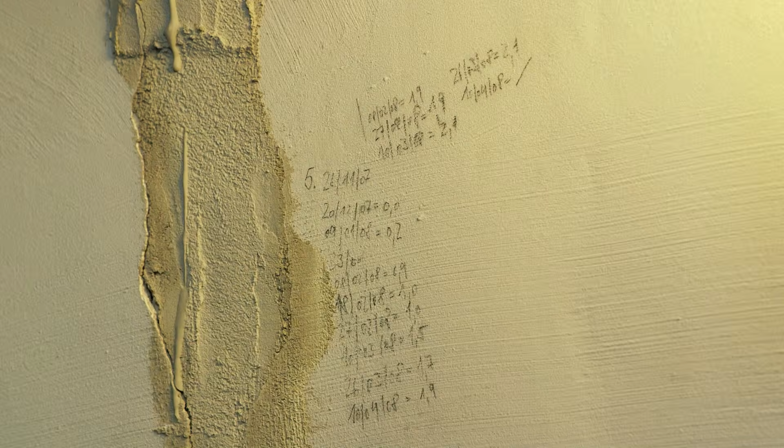This is a kind of logbook of the cracks, and when people started realizing, you see that they marked the number of centimeters that the building has moved. So we come up here in February, 1.9, in not even 1 month, in 10 days. Then if you add this all together, it comes to 15 or 16, even 17 centimeters.

With their buildings crumbling around them, the people of Staufen desperately look for a solution to their anhydrite nightmare. With the city in pieces, local authorities are working on a fix. The first stage was to plug the boreholes to prevent water from the surface from adding to the problem.

Local geologist Sandra Heisler reveals how the town papered over the cracks.

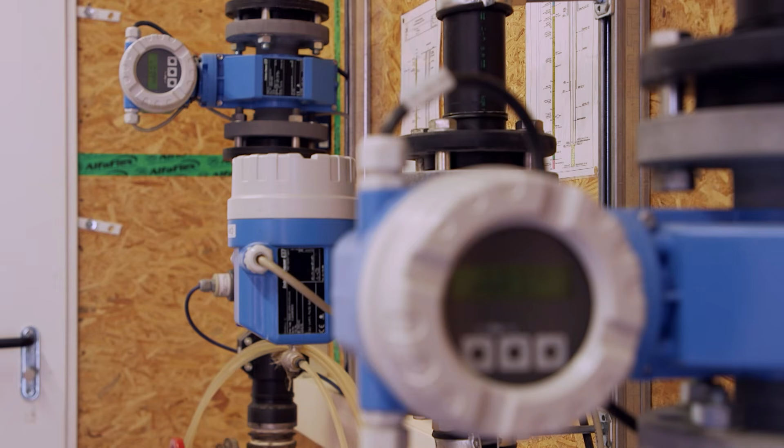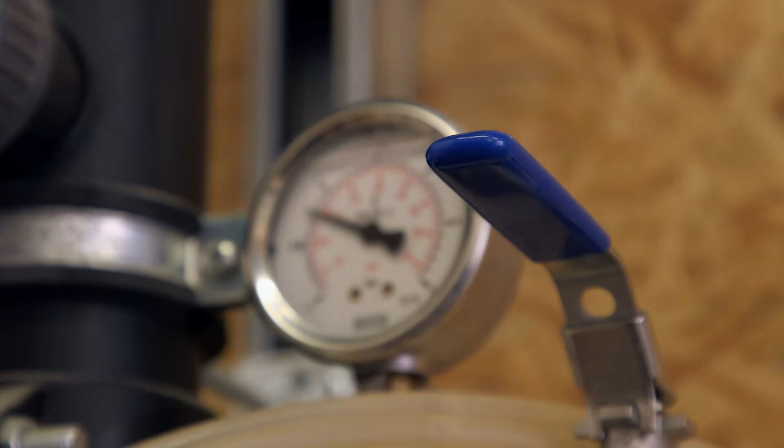But sealing the holes from above was not enough, as the anhydrite is still in contact with the ever-present water table.

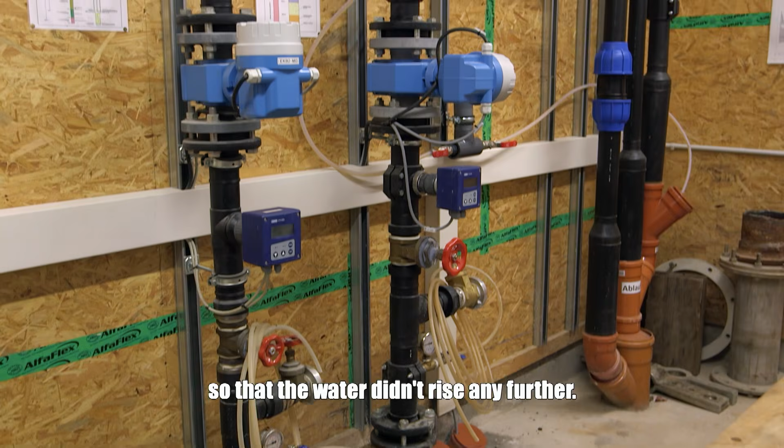By continuously pumping up groundwater, the process is slowed.

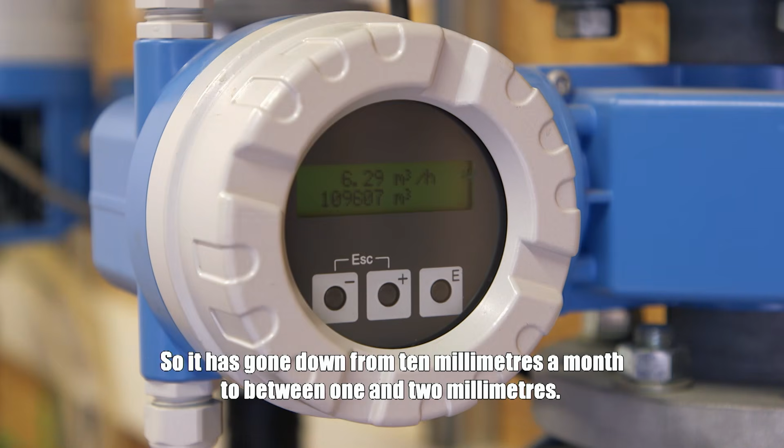Pumping out the groundwater is helping slow the destruction, but it's not a proper solution. It's like putting a Band-Aid on. But for now, all they can do is keep pumping. It's impossible to stop the anhydrite from absorbing water. Instead, residents must hope that it will cease naturally in time.